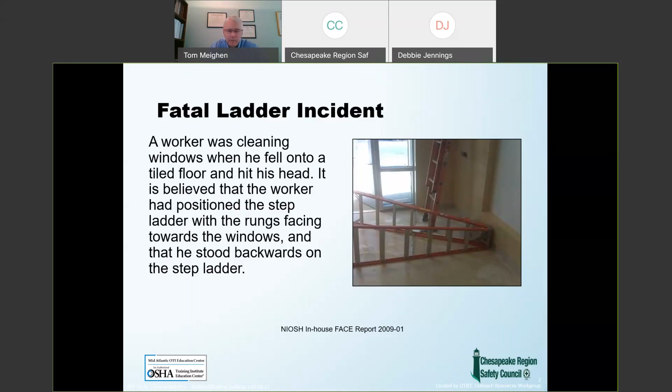Very tragic. So falls certainly do cause us some grief and some problems.

Trending. So where are we? Let's take a look, where are we as far as trending overall for falls?

So moderate increase or moderate decrease, we could say. But the majority of general industry accidents still remain to be slips, trips, and falls within general industry. Kind of a curious statistic.

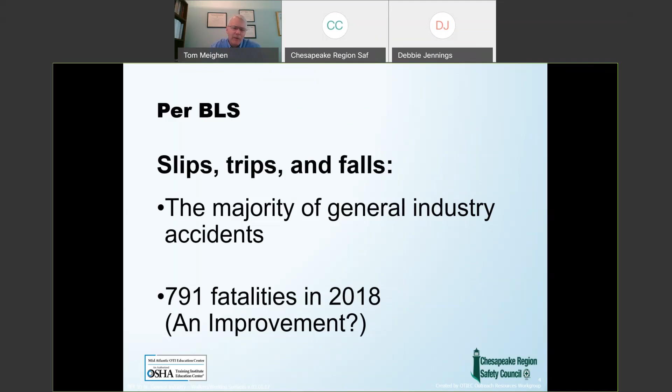Let's take a look at the citations. One other slide I want to hit you with: if you're in the construction environment, and many of our participants are, you realize falls are part of the focus for the big four, being the primary cause of fatalities in construction. But if you take a look at overall statistics, falls are still number 2 or number 3, with transportation accidents being number 1 by far. When I say transportation, it's not just working on roadways for construction operations, it's also people operating motor vehicles or somehow connected with motor vehicle operations and fatalities related to that, traffic accidents being one of the highest generators.

But a curious part of this statistic is what number 3 is, the third group of columns over: violence. This one's always a surprise to me. It's always a shock to the audience I present to also. Violence in the workplace is number 3, something to consider. Not the focus of today's discussion, but certainly something to consider.

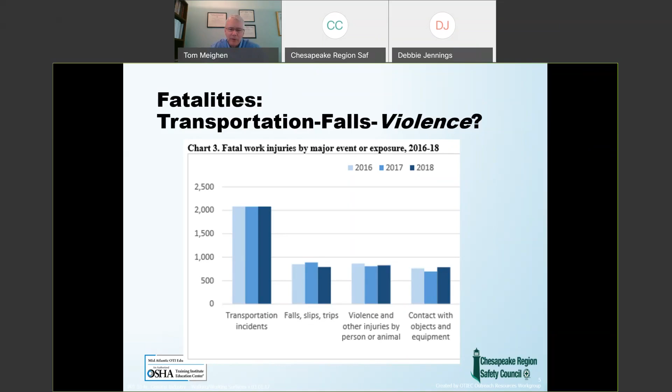So looking at citations, walking and working surfaces. Under general industry, walking and working surfaces for fall protection exposures still falls within the top 10 citations issued by OSHA. When you combine any of the other fall-related exposures, we still see significant numbers of citations in general industry focused on subpart D, 1910, CFR 1910 subpart D, focused on walking and working surfaces.

Not a lot of complexity to this standard. It's only 11 pages long. We'll cover a bit of that and some of the highlights through this discussion.

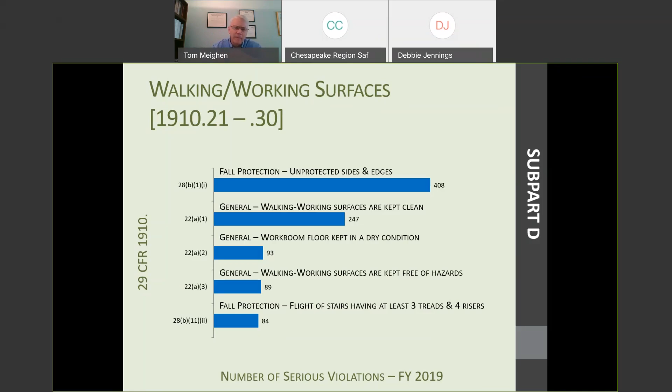Well, how about construction? I put the arrows to the side of this one. These are OSHA's most frequently cited issues in 2019, most frequently cited serious violations. 7 out of 10 are one way or another related to falls. Fall protection in residential construction, that's not really a surprise to anybody. You drive by job sites and see people working on roofs, working on framing. You see the limited means of fall protection a lot of times. Ladders not extended 3 feet above the landing.

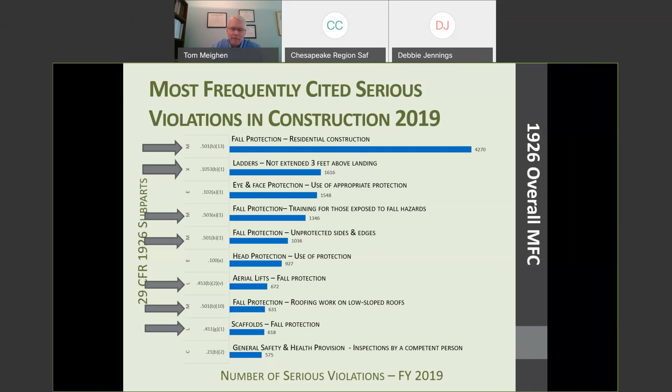Really? We haven't learned that one yet, but a good slide coming up for you on that. Scaffolding - falls from scaffolding is included in that, general safety provisions as far as being inspected by a competent person. Are people looking for what fall exposures might be present on a job site? So you can see 7 out of 10 of the top 10 citations most frequently cited by OSHA in construction are one way or another related to falls.

Well, so what else are we going to talk about here this morning? This program will be about an hour in length. My presentation will run 50, 55 minutes, and then we'll open it up for some discussion or question and answer after that. So, 29 CFR 1910 subpart D, walking working surfaces.

This standard came out just a handful of years ago. It was kind of a consolidation of some others, and we developed the standard. It's broken down into a group of very simple areas, and some that address more complex topics. If you get into areas like ladders and ladder construction, they go into details including drawings, very specific detail. So it gets a little more specific in those areas.

So we'll address identifying some of the more common hazards, identifying some of the best practices for dealing with those hazards, and then recognizing what employer requirements you have - what are the requirements for you as an employer regarding fall protection?

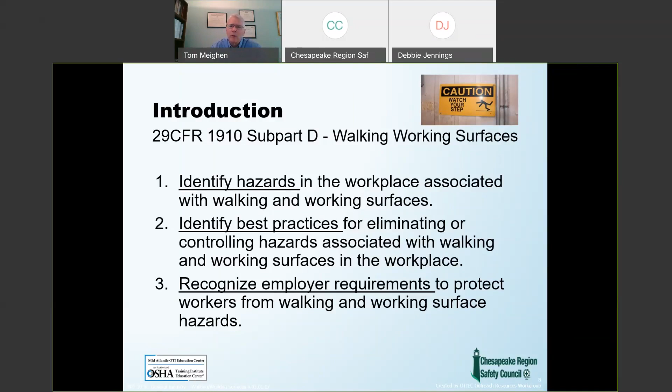So the scope of subpart D, it's worth reviewing this - I'll read it to you - applies to all general industry workplaces. Pretty comprehensive, all, right? Covers all walking and working surfaces unless specifically excluded by an individual section of this subpart. All walking and working surfaces unless excluded. If you put your feet down on the ground, if you're standing by a piece of equipment, guess what? This standard applies. Pretty broad, very broad scope.

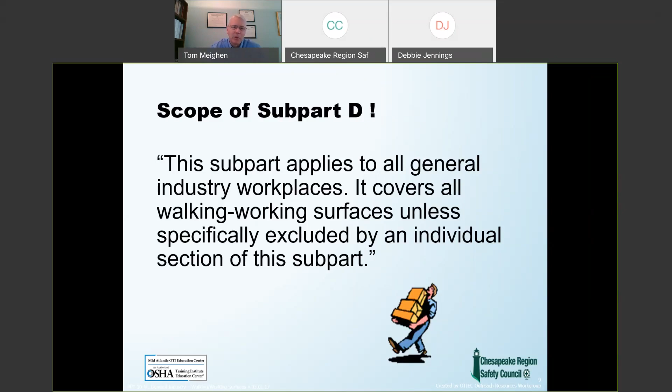So slips, trips, and falls - are they preventable? Absolutely they are, by design of workplace and work processes. And that's where, with the hierarchy of controls that we implement anywhere else, if you can engineer it out, there you go.

Take care of it: design of workplace and work processes, good housekeeping, or the administrative factor.

I don't know how many injuries over my career I've seen, but quite a few have been related just to general housekeeping situations: debris left on the floor, wet surfaces, slippery surfaces, tripping hazards, impalement hazards. Many, many injuries related just to good housekeeping efforts.

Safe walking practices. Well, what are we talking about? We're talking about just one foot in front of the other. Are people walking around looking at their cell phones instead of where their feet are going? We've all seen videos of that on YouTube, and there are more to come, I'm sure. So, wearing proper footwear. The footwear you have on is a factor in your safety for walking.

On job sites and construction, you want something that has a little bit of tread, but in an office area, tread would be a disadvantage. It depends on the surface you're dealing with, the material you're working on. There's a coefficient of friction that can be calculated on really any walking surface, and the tread or the shoe you have is a factor in how that works. Also, what might be interfering with that, such as liquids, oils, greases, antifreeze, mud, debris, can all influence that coefficient of friction.

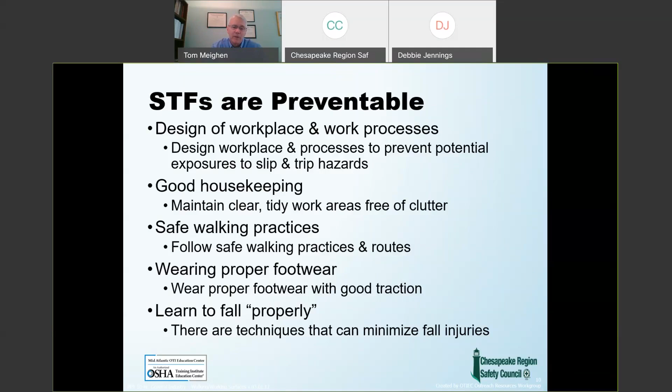So, definitions. In the standard, there's literally a page and a half of definitions. Now, the definition of a hole: a gap or open space 2 inches in its least dimension, pretty common. We've seen that one before in construction too. Low slope roof, same definition. Opening, gap, or open space in a wall, at least 30 inches high, at least 18 inches wide. Think of a window opening.

That's what we have. Qualified persons, we've seen these definitions before: qualified versus competent. Qualified person: training, experience, demonstrate the ability to resolve the problem. Competent person: having the authority to actually implement the change and get it corrected. But there's a page and a half of definitions in this standard.

Be aware of that. So what are the hazards and controls? Your typical slip hazards, nothing unusual here when you look at that: grease, oil, ice, water, snow, liquid spills, polished floors.

Early in my career, I had the opportunity to work with a group of retail facilities, particularly grocery stores. Slips, trips, and falls were definitely a factor within grocery stores. So we worked on getting their staff trained up on cleaning up after any spills they might have had, particularly in the produce department. The type of wax and polish used on the floors was always a factor, and the flooring material they utilized was certainly a factor they would pay attention to. So, dealing with those simple issues.

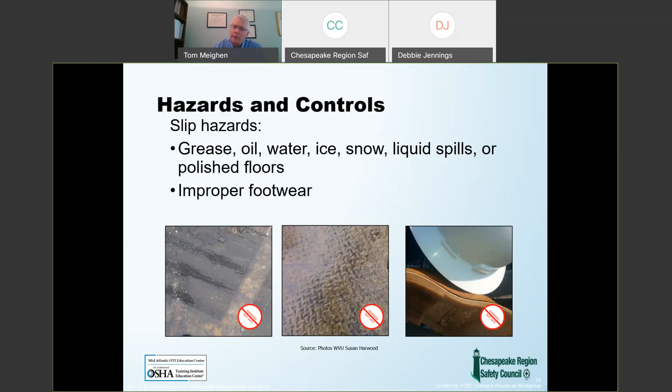Improper footwear also being a factor as far as hazards and controls. Housekeeping again plays a big part here. So within the standard, they actually address that surfaces are to be kept in a clean, orderly, and sanitary condition. We're not reading the standard specifically, but there is a paragraph that reads similar to that. There's a requirement for drainage for wet operations.

This shouldn't be a new concept for us. Clean up, or mark and report spills, so employees have a means of actually addressing spills and either cleaning them up themselves or getting them cleaned up and protecting the area. In the interim, you also see traffic cones set up, you see the wet floor sign set up, to protect people in those areas.

Eliminating sharp and protruding objects. Now what are we talking about here? Again, proper storage of materials, things overhanging that somebody might walk into. Could be something as simple as somebody leaving a drawer open in an office environment.

Removing ice and snow frequently and regularly. Inspection and removal of ice and snow frequently and regularly. This is actually addressed very lightly, but it's in the standard, so be aware of that, pay attention to that one. What is frequent and regular? What's your operation, what's your exposure, what are people working in? Is this part of their working environment? Is it part of their access? Is it part of their means of egress,

coming or going, we'll say, of your office area or your work environment?

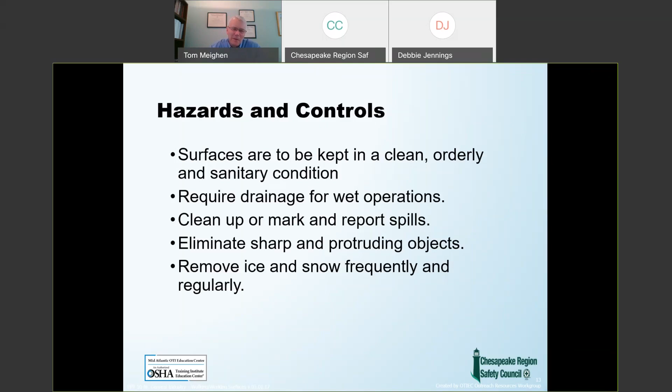Capable of supporting intended loads. Remember the old standard? It actually had to have loads and rack storage that were marked as far as what the load capacity was. I can't find that in the standard. Maybe it's buried in there, but I haven't seen it yet. But they do define it's got to be capable of supporting the intended load. What is the intended load? Is it one employee? Is one employee carrying material? One employee pushing a cart? Two employees? A forklift with loaded material on it? A boom lift, a scissor lift? What is your intended load on that floor or on that surface?

It's got to be inspected regularly and as necessary for hazards. So people are paying attention to look to see if there are hazards. Are we really paying attention? Did the type of operations that we perform, manufacturing or construction, generate debris? Does it generate some means of bad housekeeping? Can it tear up the floor of the walking environment that we're on? Can simple wear and tear affect it? Paying attention to these simple little details.

And providing a safe means of access and egress. Here we go, the coming and going, right? With that, employees are coming into the building, into your facility, and leaving the facility. Are they protected during that transit period? Actually addressed. Pay attention to that.

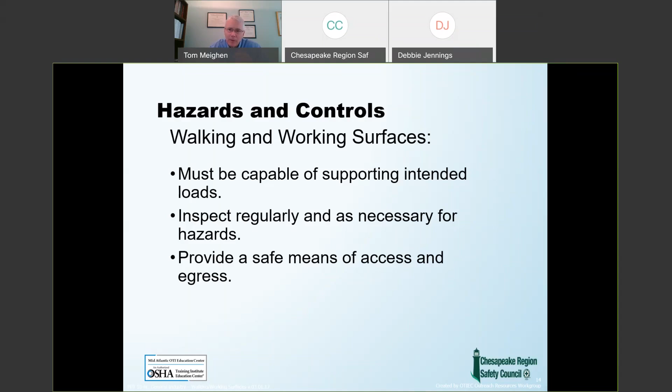So, hazards and controls. Trip hazards, well, could be poor housekeeping, loose flooring, carpeting, uneven surfaces. You look at the slide on the right, they show the indication of either an open gap in a flooring material, and certainly somebody could get hurt very severely in that situation. The center slide kind of looks like roofing material, but just consider normal wear and tear.

As we work in an office environment, for example, we walk up and down the same hallway every day. Over a period of years, the carpet deteriorates. You get a little thread that pulls up. Somebody trips on that. That thread then breaks a seam. That seam gets torn up. Somebody else trips over that. At what point do you recognize you have to address that hazard? Paying attention to those simple little things.

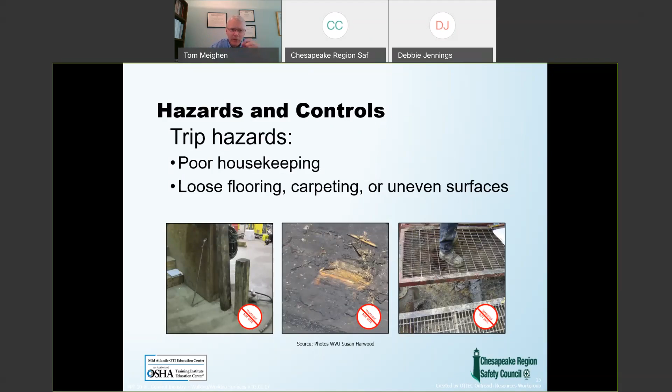Cords, hoses, open drawers, protruding items. Cords and hoses, a common trip hazard. In a manufacturing environment, you see all kinds of cords and hoses available for whatever operation is being performed, as you do also in construction too. So how are they stored? How are they laid out? Are people protected so they aren't tripping over these?

And then looking at the slide on the right, they indicate in the picture here just piping, storage, things that might be protruding hazards that people are going to catch themselves on and fall over. I've seen a number of cases where I've had people unloading trucks. You take the material off the truck, set it down behind them, turn around, pick up something else, and then trip over what they just put down. Think about it.

Then once they do unload the truck, is your path clear to where the material is eventually going? Have you taken a walk through and made sure that there's nothing in the way? No slippery surfaces, no impalement hazards, nothing to trip over, and you can get yourself to where the material has to finally go. Simple concept, but I've seen many accidents related to that.

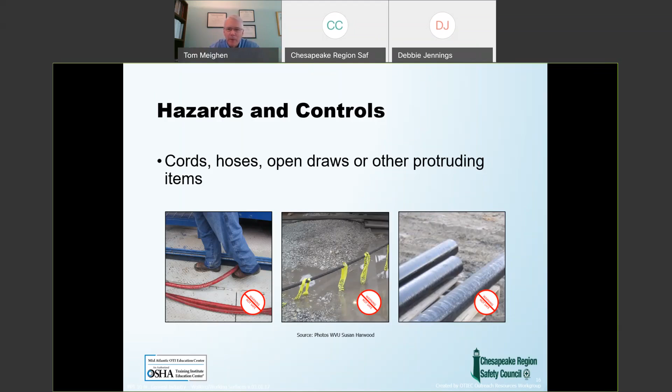So controlling trip hazards. Let's deal with those aisleways and passageways. They've got to be well-lit. They've got to be cleaned. They've got to be marked. Do you have them marked out? Do you have storage within your aisleways? Something to consider. Do you have a means of controlling that so that it's inspected and addressed on an ongoing basis?

Material storage, work-related scraps. Are you cleaning them up? Do you have bins? Do you have materials available to clean them up efficiently? Trip hazards, addressing those. Hoses, cables, we covered that just a moment ago.

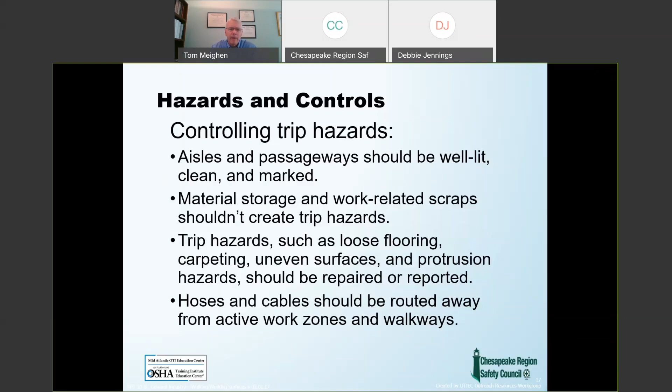So fall hazards, what else do we have? Elevated surfaces that you might have in your work site. Tops of tanks, towers, machines, platforms, open pits. Think of your local oil servicing facility, pick a name. But within those, they have pits where people are actually working underneath the vehicles. Is there a means of addressing fall protection for that? If you notice, some of them have nets that they'll pull over top of the face of that in case somebody falls into it.

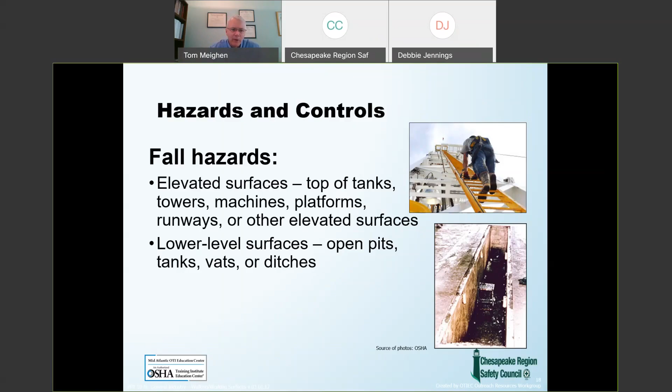You also notice that within the standard, there's a means of addressing that specifically, because they realize you have to have a vehicle on that, so you have to have access to that point. But how do you then at least delineate the area where the hole is, so people are aware of the hazard and don't accidentally find themselves in that hole? Tanks and towers, best engineer these things. Whenever they're being constructed, here is your opportunity, really anytime for a walking working surface, to implement the proper controls in the engineering and design phase, so that people are protected from that point going forward.

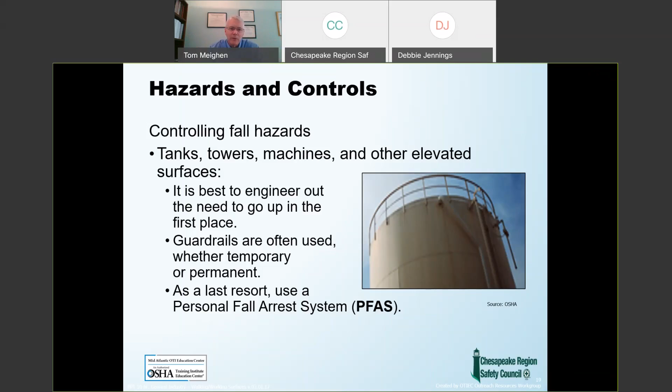Guardrails might be the best means you utilize. And as a last resort, remember our hierarchy of controls: we're going to engineer it out, we're going to go with administrative means such as housekeeping. If those don't take care of it, then we are down to using personal fall arrest systems. Yes, PFAS, personal fall arrest system. You got your anchorage points, your body harnesses, the components, your ABCs.

Are there any decent materials available for fall protection nowadays? Wow, what the manufacturers have come up with. Now we have lanyards of any shape, size, and length that you want. Some are retractable, some are just shock absorbing. Some are 3 foot, some are 6 foot. Retractables go 10, 12, 30 feet - remarkably distant - but they act much like your seatbelt. Somebody falls, bang, it stops.

Anchorage points, what are you going to tie off to? They have beam clamps available. They have clamps to go around piping systems, all kinds of materials. And the harnesses themselves, how they have improved. I started my career literally when they used body belts. They would give a person a body belt and maybe even a steel, not a rope, lanyard.

So which way do you want to fall? Do you want your toes to hit, your head forward or backward, or do a sideways bend? So the harnesses and the quality of the harnesses have improved, and also with that, the comfort of them too. They even now have drop-down loops, so if somebody does fall, they can support themselves until they're rescued. You do have to consider rescue of the individual too if somebody should take a fall.

So you just hand it to them, say, oh, by the way, here's your harness, here's your lanyard, go have a good day? No, you've got to have very good training. Anybody that's exposed to fall hazards should have training related to their exposure for falls. They have to know how to inspect the material. What are the requirements for this harness? Does it have an expiration date on it? What is it? Who sets that? Typically the manufacturer. Are you looking for burns in it?

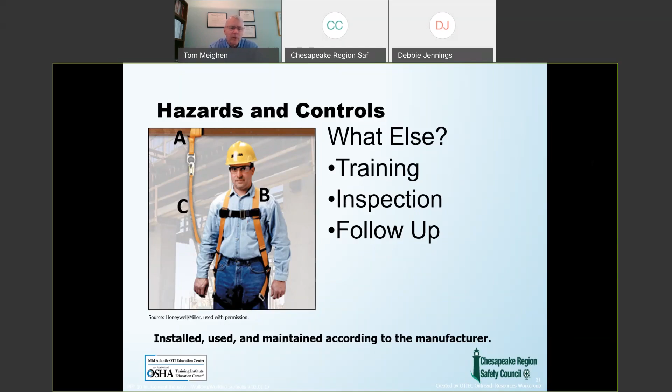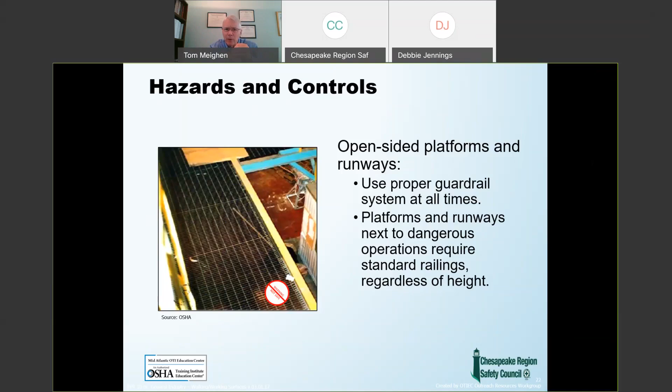Hazards and controls: open-sided platforms, runways - proper railing, proper guardrails are required. If it's over top of dangerous machinery, guess what? Got to protect it. 4 foot is generally the fall protection requirement for general industry. What is it for construction? 6. Interesting. What is it for scaffolds? 10? Yeah. But then you get into steel erection, we get into other standards too, different elevations. But in general industry, 4 foot. If it's beside dangerous equipment that somebody could fall into and get hurt, ongoing fall protection is required.

Structural collapse. Back to the question: does your surface support - is it adequately built to support whatever your expected load is going to be on that surface? People, equipment, are you going to run a forklift across that someday? Well, if there's a potential for that, better make sure that the flooring can take the load.

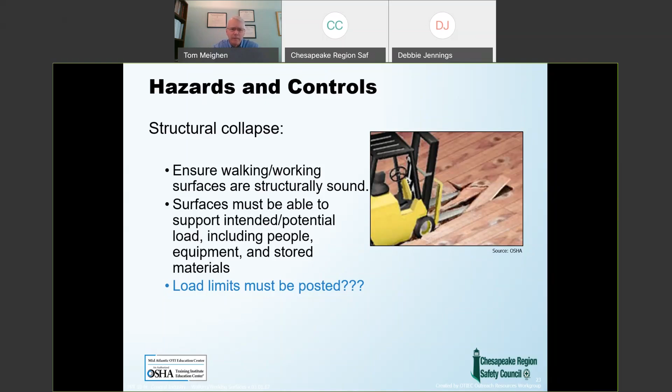Hazards and controls, we'll hit on a couple of the highlights here. We'll address ladders, scaffolds, stairwells, wall openings, elevated surfaces. Start off with ladders. We've all seen ladders, nothing new to anybody here. Your basic step ladder, your extension ladders, your fixed ladders. Fixed ladders, the quality of those are certainly getting better and better as the years go by, and you'll see why.

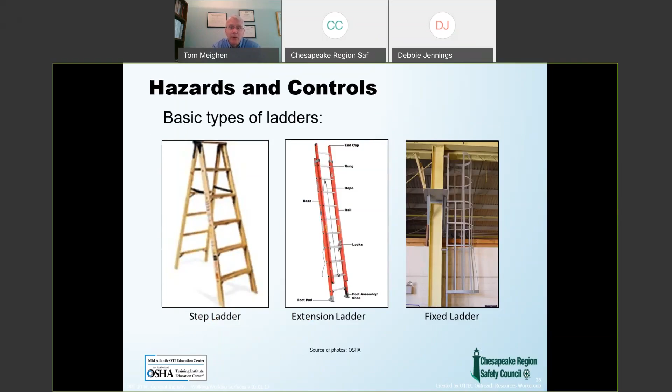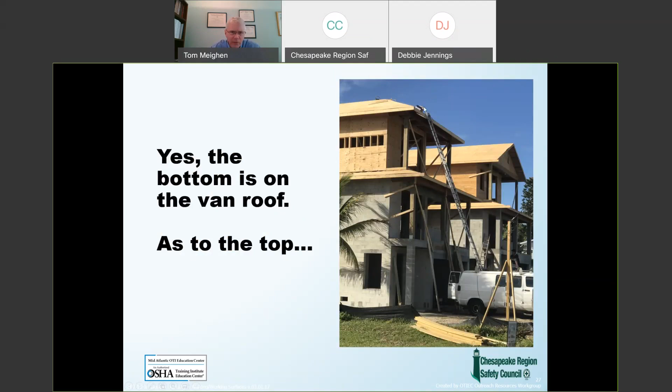This is a ladder picture taken by Dave Medeiros, our president. He was doing a drive-by through a neighborhood and noticed a gentleman on a ladder going up, with the ladder base set on the roof of a van. I guess he set it there so he could avoid getting the extra 3 feet over the top. People get very creative, very, very creative. And that certainly is not the means of dealing with it.

But ladders have certainly contributed to a lot of accidents, a lot that I've seen over my career. Scissor lifts, while hazardous, I have seen actually be a factor in reducing injuries for employers I've worked for, also increasing productivity, so they become a wonderful tool. But there will never be a replacement for all ladders. So the leading cause of fatalities and injuries comes down to the right choice of ladder, using it properly, making sure it's set up properly, and making sure the ladder is in good working order and has been inspected.

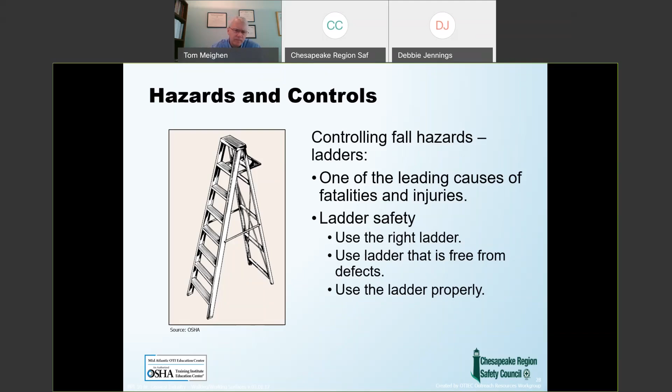Had a situation where a job site was finishing up in DC in a construction environment. One of the journeymen sent down his apprentice to go pick up a ladder because they had to do some work in the ceiling, which was about 10 foot high. The apprentice was a little lazy, had a choice between a 6-foot ladder and an 8-foot ladder. He came up with the 6. What happens? He ends up working off the top of the 6-foot ladder.

Very top - an 8 foot would have gotten him there safely, but he ends up on top of the 6-foot ladder. The ladder kicks out. As the ladder goes down, he goes down. His leg gets hung up on the ladder on the way down, a compound fracture of his leg. A 4th-year apprentice ruined his career early, right there. But this was just a matter of the choice of the wrong ladder.

And also, let's look at the journeyman too. What was his part in that? He didn't send that apprentice back down to get the proper ladder, even though it was available. So he's not free of blame either. They both learned a bad, tragic, very difficult ladder lesson.

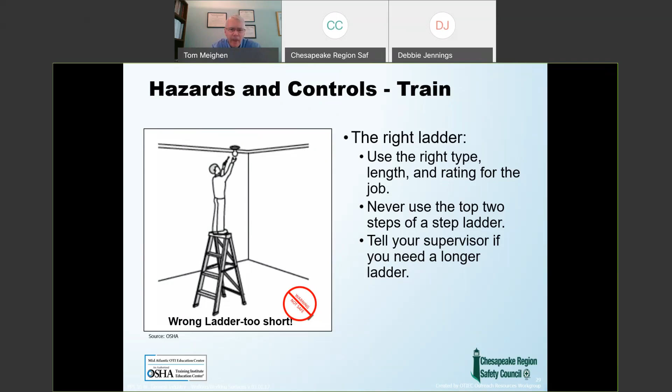Hazards - simple 3-point contact, climbing up, climbing down, making sure people are holding on. Got caught up in one bad injury, and a lawsuit came as a result too. A worker on a job site decided to go up a job-built ladder, and the ladder was actually built right, but it was put in the wrong place. It had been installed right in the fall protection, the perimeter fall protection, top and mid cable. This gentleman decided to go up the ladder with tools on his shoulder, one-handing up with tools on his shoulder. Gets to the top, has to balance himself as he pulls through the cable. Well, that doesn't go well. He goes off backwards - and here's the interesting part of the suit - he lands on somebody else's employee on the way down. So now we have 2 people out of commission and badly injured from that operation.

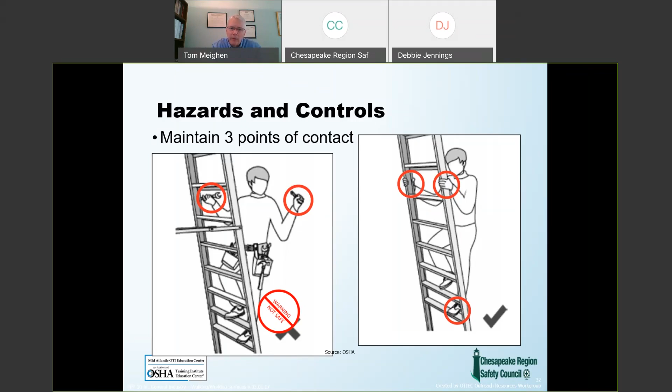So hazards and controls, 3 foot over top. This citation, it's remarkable that it gets issued as many times as it still does. It's probably in the top 3, I think, if we go back and look at the slide again, of citations issued in construction. And angling the ladder properly, your 4-to-1 ratio: 4 foot up, 1 foot out.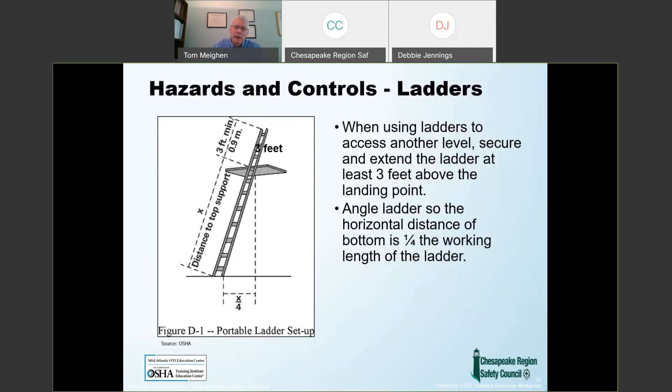Hazards and controls for fixed ladders. I mentioned this earlier on in the presentation. OSHA really got into some very good specifics as far as requirements for ladders within the standard. I'll just show you, here's a print for example, some of the detail. And the cut and paste that I have here on the slide too came right out of the standard itself. If you're going to build a ladder, take a look at the standard. It gives you some very good details and specifics as far as what the requirements are on building that ladder before it's installed. Hazard control.

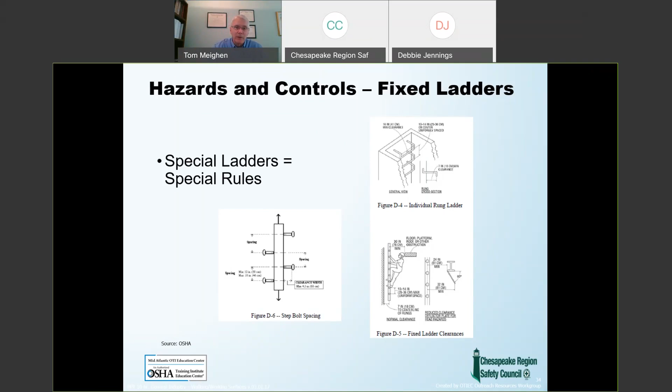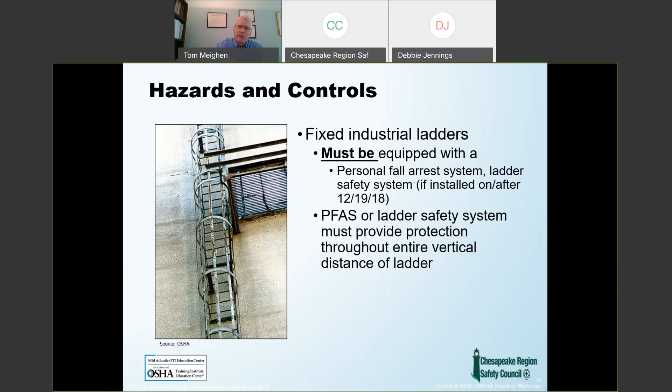So any fixed industrial ladders have to be equipped with a personal fall arrest system or a ladder safety system if installed after December 19, 2018. We're there, folks, right? The personal fall arrest system's got to provide protection throughout the entire vertical distance of the ladder, so they are protected. There's even a piece of the standard that requires upgrades for some of these existing and much older systems. Save that, you can take a look at that.

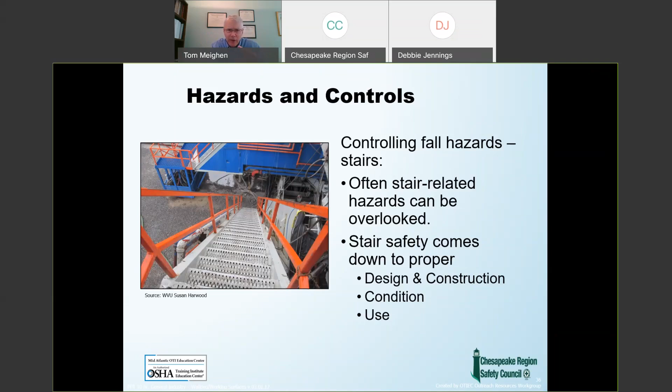Controlling fall hazards on stairs. Often stair-related hazards can be overlooked. We just start taking stairways for granted. We walk the stairs every day, we don't pay an awful lot of attention to it, our mind gets used to it, gets set to that. But the design, the construction, the condition of these all plays into it, as does the use of these. In each of those accidents I just described, one of those factors played into that accident, whether it be ladders, but it applies to stairways also.

Fixed industrial stairs have to be able to support a 1,000-pound live load, okay. 22-inch wide minimum, angles 30 to 50 degree angle, so what kind of a slope can you utilize, and no more than a 1/4-inch variation. Take a look at the diagram slide here. The 1/4-inch variation has to do with the tread and the riser. Your mind gets used, as you go up a set of stairs, to the step pattern, and if you have a variation more than, say, a 1/4 inch, it'll throw you off. So be aware of that, and that's one of the reasons they have that included.

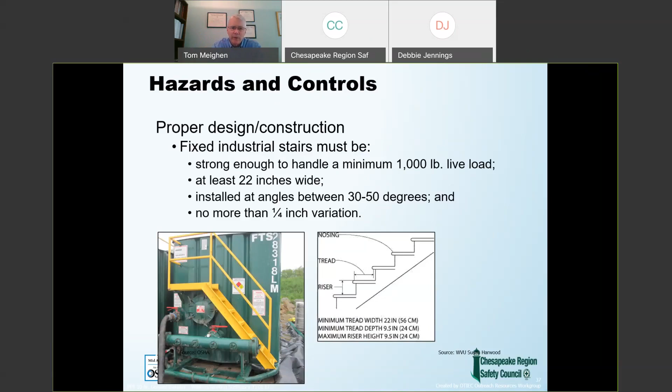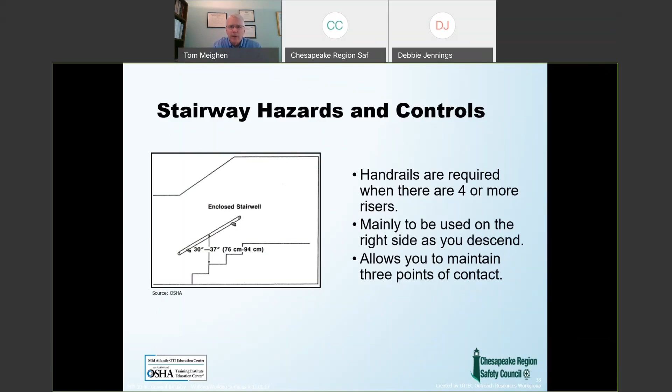Handrails required when you have 4 or more risers. Must be mainly applied on the right side. So in this case we have an enclosed stairwell. You're coming down and you have your right hand on the railing, stronger hand on the railing as you come down. These are slides also, both of these photographs are actually taken out of the standard itself.

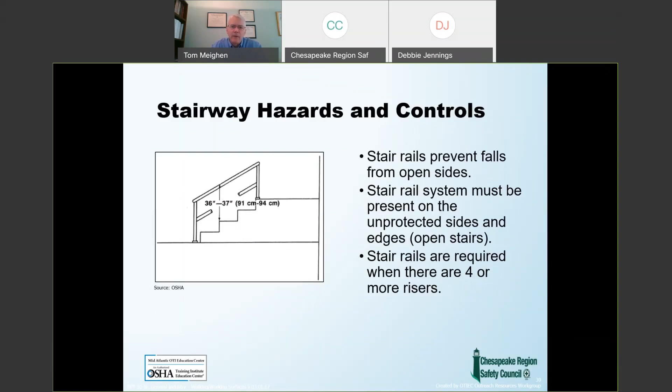Now here again, people are coming down the stairwell. Their mind is used to the step pattern, not always looking out ahead. Here again, much like driving, cell phones are a factor, I think, in a lot of falls today. People aren't paying attention to the details. They get hung up, trip over something, bang, there you go.

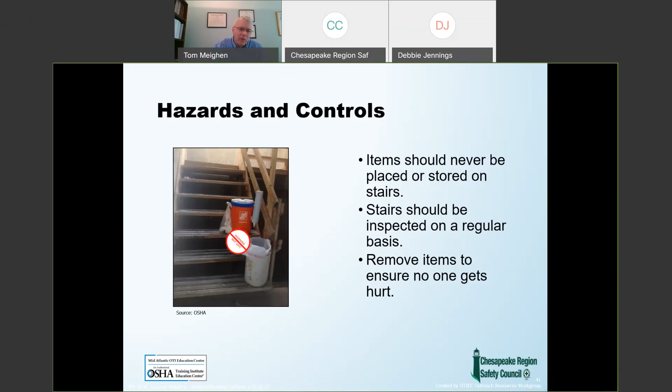So no storage materials in the stairwell. How about guardrails? How do we protect our perimeter walls? Well, wall openings that drop more than 4 foot have to be guarded. Guardrail systems have to be installed, with a top rail, mid rail, and toe board.

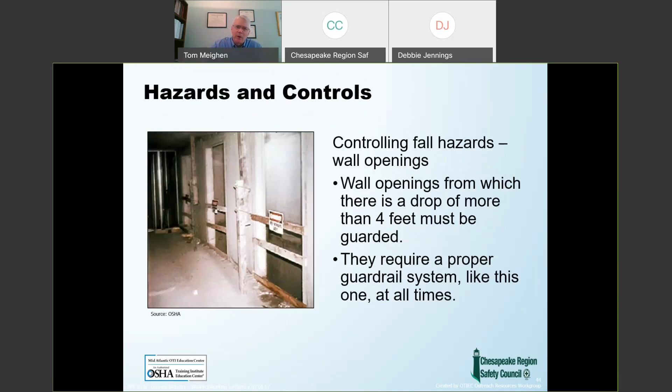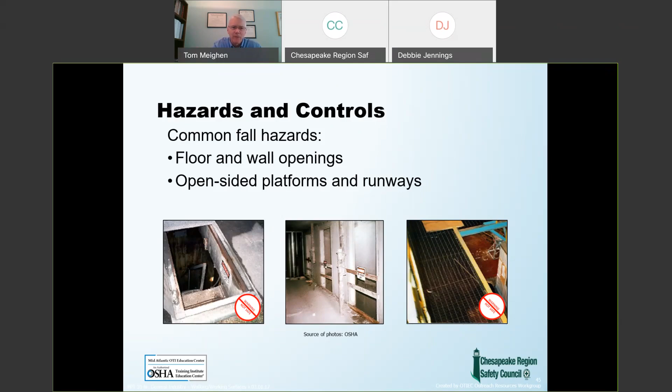The second slide, the one in the middle there, is much like the one earlier, indicating that we have the perimeter protection with the top rail, mid rail, and toe board. And the one on the right, where we have grated flooring but no railing at all, and we have equipment down below too, that would require protection by railings, with a proper cover or guardrail system at all times for this open hole.

Posting a guard - this is actually coming from the OSHA slide collection too. Posting a guard to monitor these openings for temporary access is permitted. Well, if you're going to post a guard, much like construction fall protection, make sure they don't have any distracting duties. Again, back to the cell phone or something else that's going to distract them from monitoring somebody going into that area. Is that your best means of protection? Probably not. A real physical barrier is going to give you better protection.

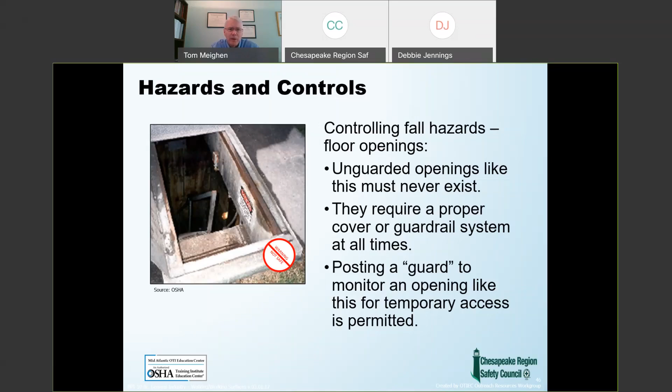Guardrail systems, how do you build them? Have you seen this before? 42 inches plus or minus for your top rail. I've seen that before somewhere - yeah, construction standard, much like the personal fall arrest system. By the way, if you're going to utilize a personal fall arrest system for fall protection, some of that's even addressed within 1910 in a different section under personal protective equipment. So pay attention to that too.

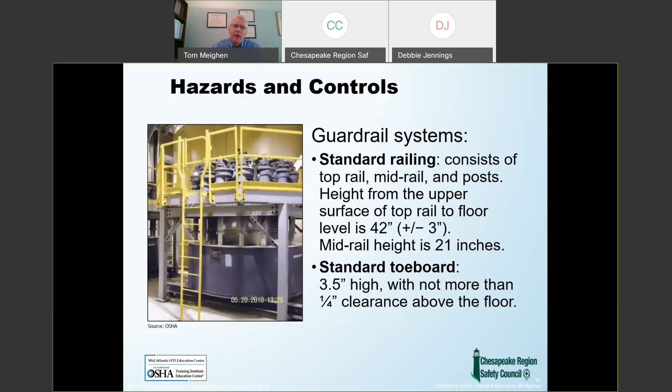Standard toe board, 3.5 inches high. Where does that come from? What's the width of a 2x4? Well, we applied that for construction, also in general industry now. So let's take a look at just some of the highlights of Subpart L, 1926, regarding scaffolding. Just going to hit some of the highlights here.

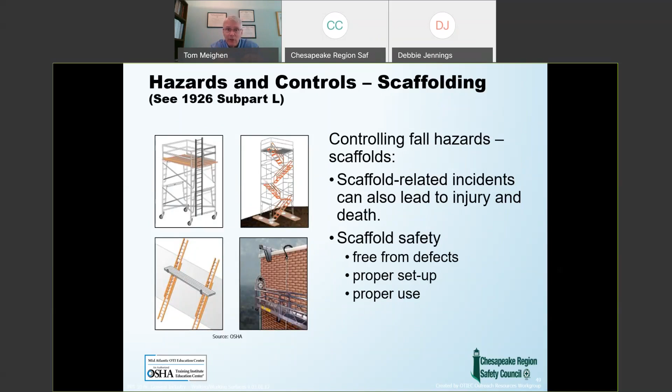With scaffold-related injuries, make sure they're free of defects, properly set up, proper use of it, proper training. If somebody gets on a scaffold, they should be trained on that scaffold, on getting on, what to look for, and what the hazards are, and how to get those hazards addressed. The scaffold has to be erected by somebody who's competent and qualified, so somebody who actually knows what they're doing is involved in the erection of that scaffold. And it has to be inspected prior to use.

Remarkable shortcuts taken by people sometimes, not only for their own safety, but for others too. All right, going on.

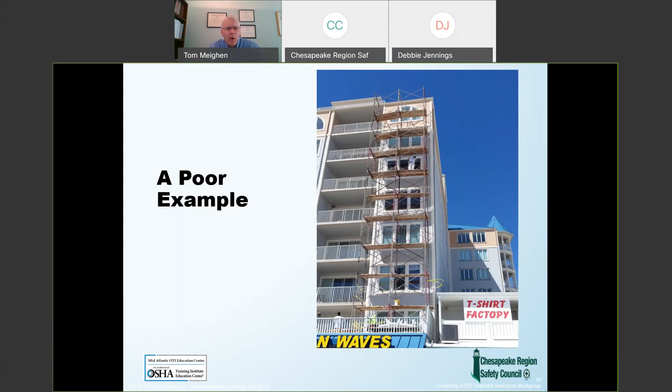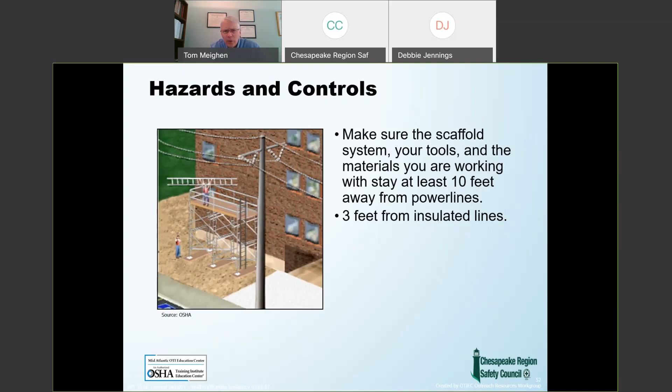Electrical exposures are another area frequently overlooked with scaffolds. It's not just the scaffold itself, but consider the tools you're working with too. If you have any conductive tools on the scaffold, that could add to your exposures, so make sure you have adequate protection.

For scaffold platforms, if it's rolling or freestanding, use a 4-to-1 ratio, 4 foot up, 1 foot across. You can use outriggers to help stabilize the platform. How about rolling scaffolds? Do you transport people around in a rolling scaffold? Not a good idea.

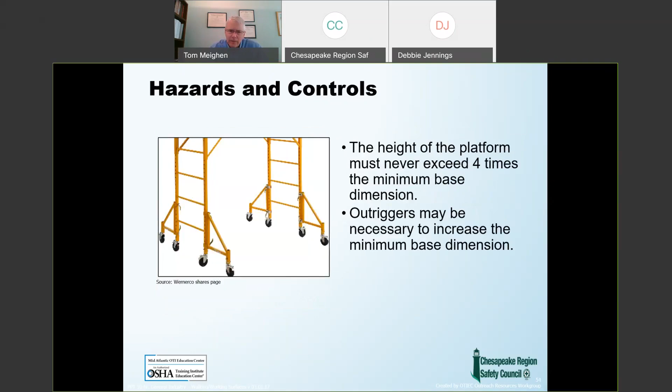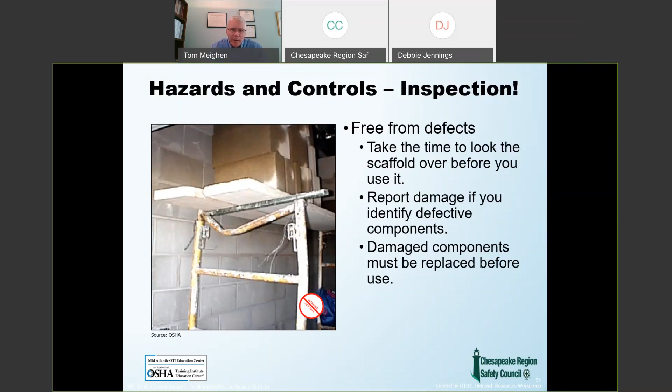This is a great picture, OSHA provided this too. If your scaffold is covered with defects like this, it's time to get rid of it. In addition to not having any real adequate fall protection, it looks like it might be at about a 6 or 7 foot level. It's interesting that they put a piece of strut here and just wire-tied it on top of that damaged scaffold, so they could put about a ton of concrete block on top of it to support it. And I don't see any cross braces there to support it either. So this was a disaster just waiting to happen.

Scissor lifts are addressed also. ANSI has come out with a new standard on aerial lifts and aerial lift platforms, including scissor and boom lifts. But while scissor lifts are a wonderfully productive piece of equipment, make sure people are trained properly.

You read the owner's manual, people are familiar with the operating controls and the limitations. You're familiar with the grade of the operation you might be working on, as far as with the transit and also the working area, the grade, the elevation. Avoid upset. Also, is your ground supportive? Is your structure supportive?

Excuse me, there's a lawnmower operating outside my window right now.

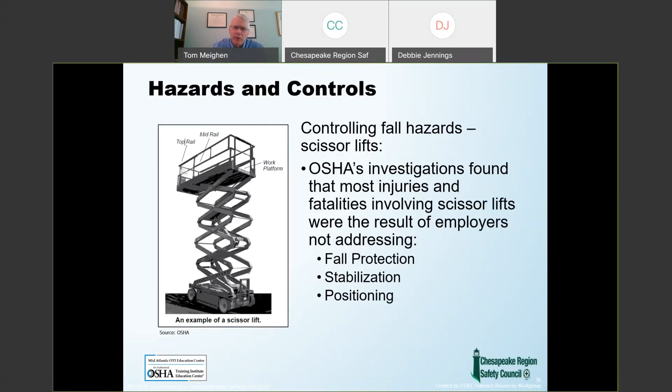Is the ground supportive, so you won't have an opportunity for anything to fall into the ground and upset the scaffold? Also consider wind exposures. You have a potential wind exposure if you're operating outside, and all considerations. But with those, make sure people are properly trained.

Do you need supplemental fall protection if you have railings? You may, and that might be a requirement. The manufacturer might address that also, and the general contractor might address that also. Sometimes people get lazy and want to stand on the mid rails. Not a recommended practice.

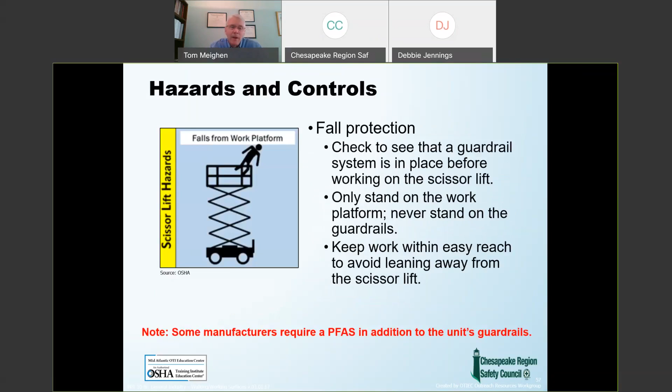Hazard control, stabilization, positioning - what could upset it? Vehicle traffic - is it set up in an area where you might have vehicle traffic?

I had one situation on a job site, somebody was operating a scissor lift but they were welding from it. Welding leads ran up to the scissor lift. They decided to transit, move the lift another 20 feet. As they did that, the welding lead was wrapped around the railing. The bottom of the scissor lift doesn't recognize this, and it upset the scissor lift because the cable for the welding lead was secured at both ends. It dropped it over.

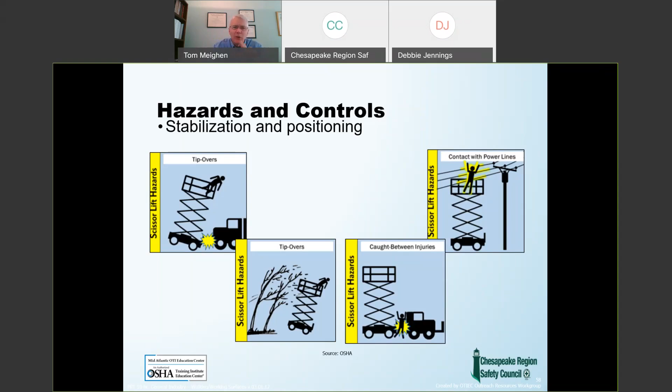So general exposures - we'll address wind exposures with scissor lifts. Kind of interesting. Got a question coming up for you.

Rope descent devices - think about window washers. Anchorage certification by the building owner. Now this is a twist, something different under Subpart D, 1910 Subpart D. Is your rope descent system actually certified by the building owner? Is it safe? Who's going to put their name on that?

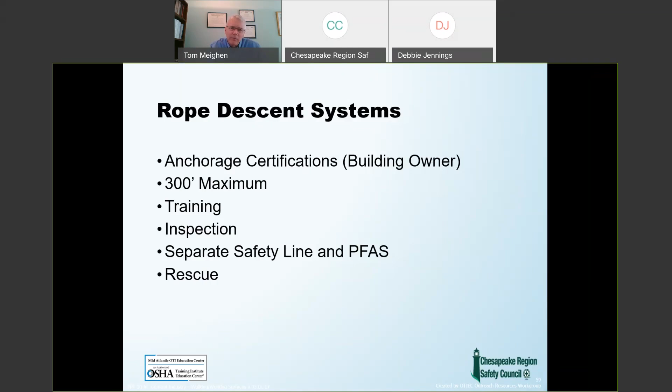300-foot maximum, and with that, also training requirements - no surprise there. Inspection, yeah I would certainly inspect that. Separate safety lines, fall arrest systems, and rescue systems in effect. How many window washer programs out there have really well-practiced or effective rescue systems put together? I don't have an answer for that, but I don't feel comfortable that it's every one of them. I think many of them probably just expect or anticipate the local fire department would be their response, and that's not the way you want to go.

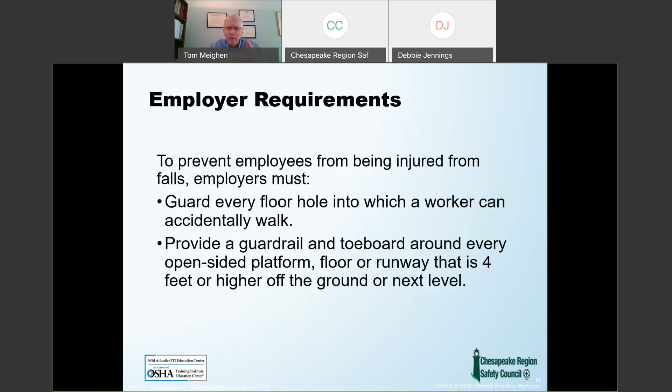So, employer requirements - as an employer, what are your requirements? Prevent employees from being injured. You've got to guard every floor hole into which a worker can fall. Provide guardrails and toe boards around every open-sided platform, 4 foot high, or if you have dangerous equipment within that area that employees can fall into.

Regardless of the height, protect that equipment, the employees from the equipment. Other means of fall protection fall under the personal fall arrest system, which falls into PPE, 1910-140, also a subpart within the 1910 standard for PPE, so address that.

Safety nets are rarely used. You might use them in that grease pit application. Travel restraints for fall protection, with training and retraining of people, is always a requirement, always a recommended practice.

Guardrail systems, nothing particularly new for most of our audience. 42 inches plus or minus 3, with a mid rail at about 21, and that top rail is supposed to support, get this, 200 pounds in a downward outward direction. 200 pounds, so that's a big employee. Not encouraging him to do this, but sitting on that guardrail, is it going to hold him?

What if that employee is 3 feet away and they trip and fall into the guardrail? Is it now 200 pounds or more? So this is a minimum requirement. I always look at this as a very minimum requirement. You should go over it, much like many of the OSHA standards.

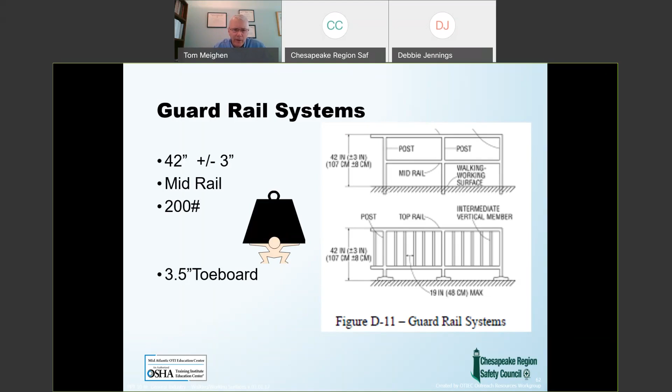And also the requirement for the 3.5 inch toe board. This drawing, this figure, also comes out of the standard itself. It's a cut and paste.

Floor coverings - we showed that picture of the opening with the sign on the inside. With that opening, how should they protect it? Well, if you put a cover on, it's got to take twice any intended load, and it's got to be secured so it can't be displaced. That doesn't mean you have to screw it down - it can still be a hatchway with a hinge and a latch on it.

This is general industry, but how about construction? The 2 times intended load, yeah. Secured, yeah, so it can't be accidentally displaced, yeah. But anything else? Under construction, you have to mark it - you've got to label it, hole or cover.

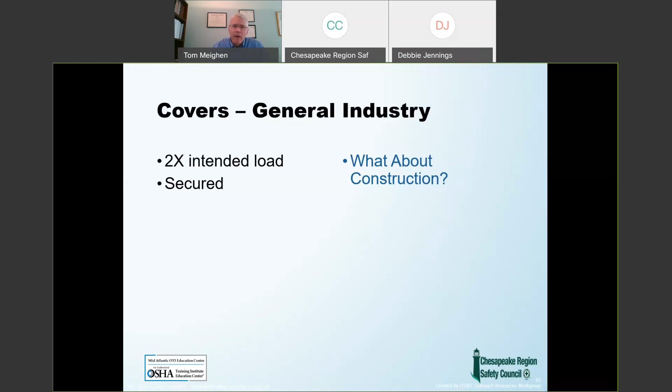For general industry, is that a good practice, a recommended practice, that people know that's an opening? Yeah, I think that's a good idea. But it's not built within the standard that way.

So other employer requirements: working conditions free of known dangers. If you walk through and you see the hazard, you have to provide a means of protecting your employee, even in the interim, until you come up with a permanent means. It's still going to protect them temporarily. Keep floors and work areas clean.

Select and provide personal protective equipment at no cost to the employees. Yeah, nothing new there. And train them on the hazards.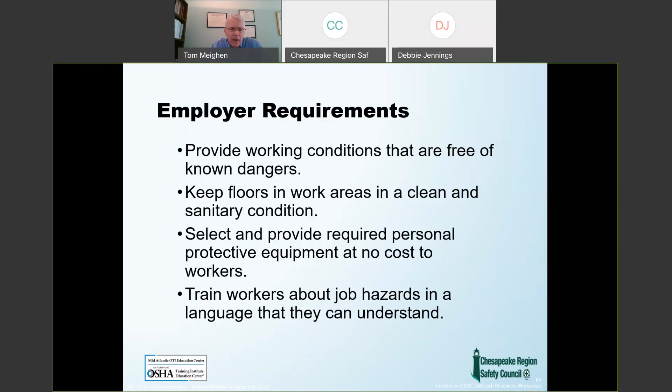All right, let's take a look at some of the hazards that might be out there - some photographs that OSHA supplied through West Virginia University.

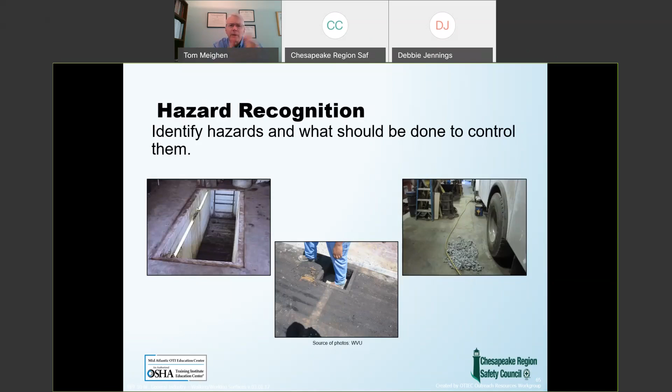So we have the open pit here on the left-hand side. Clearly we have a hazard. Within the standard, there's a means of addressing that - there's actually a little section, a couple of paragraphs, that address how to deal with servicing pits like that. Your opening here in the second slide, in the center one, clearly I would put a protective covering on top of that. On the right, well, this is a matter of housekeeping, improvement of housekeeping in that situation.

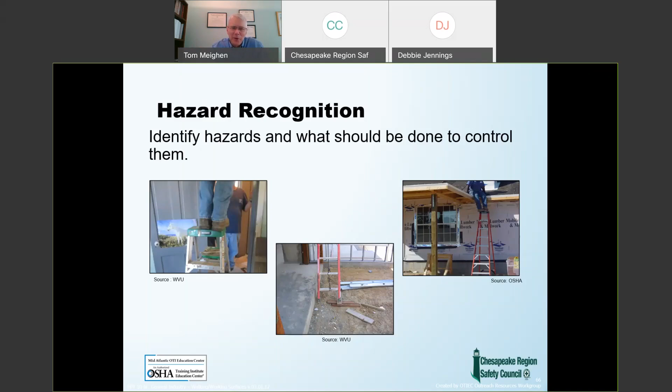And this poor individual here on the right-hand side, he just keeps popping up in slides from motion. So obviously he should have an extension ladder set up in a proper arrangement for that, because he clearly has a fall coming off of that step ladder into that situation.

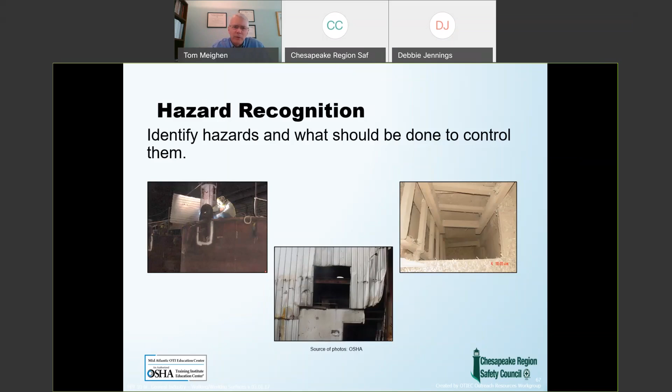Center picture, not a very good picture, but you can see we have a wall opening with a walkway in the background. The wall opening is not protected. The right side is actually a conveyor system, a conveyor pit, with about a 12-foot fall with no protection. Obviously, it should be protected.

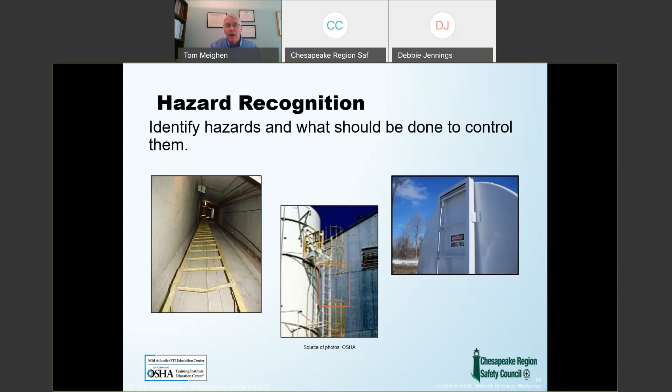On the right side, the issue is if you had to climb this ladder - we realize it's to be rotated in place - but if you had to climb this, your toes are bumping against the back wall of the tank. Again, the standard goes into very specific details as far as how you would build that ladder and what distance the person should have from the back wall to the ladder tread. Actually detailed within the standard.

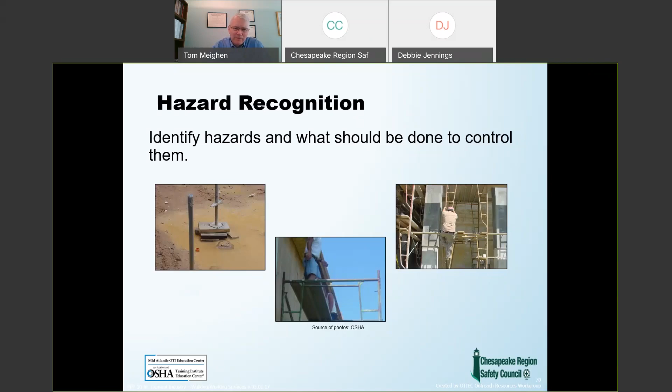Center slide, I don't know what the elevation is, but it probably needs a railing and probably needs a whole platform on that too. And on the right side, what's your means of access for a scaffold? Not climbing up the end buck - the masonry bucket, that is not the way to do it. Need proper protection. So let's take a look.

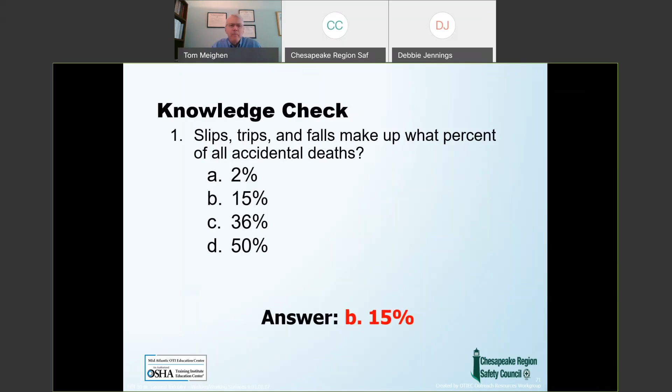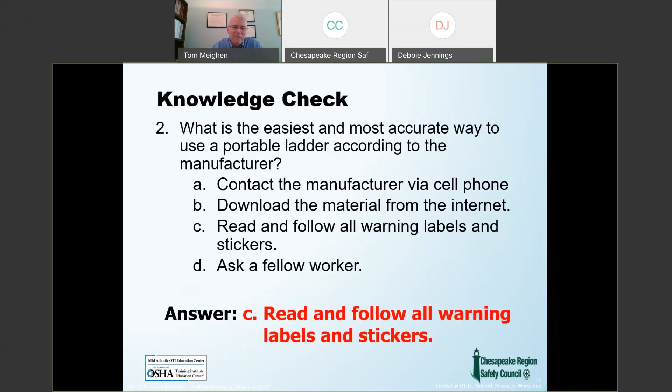Using a portable ladder to access another level - a step ladder, can you use that? I remember a guy back in the slide coming off that roof. Portable ladders may never be used... never? What? What's the sense of a portable ladder? It's got to be secured and extend 3 feet above. Carrying tools permitted? Well, I think we all know the answer to that. Ladder should be secured and extend 3 feet above the level you're accessing.

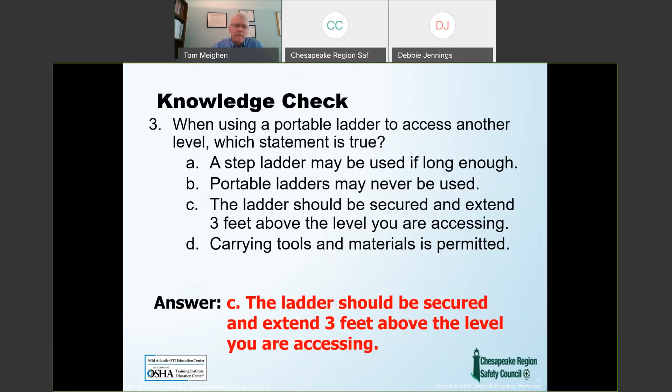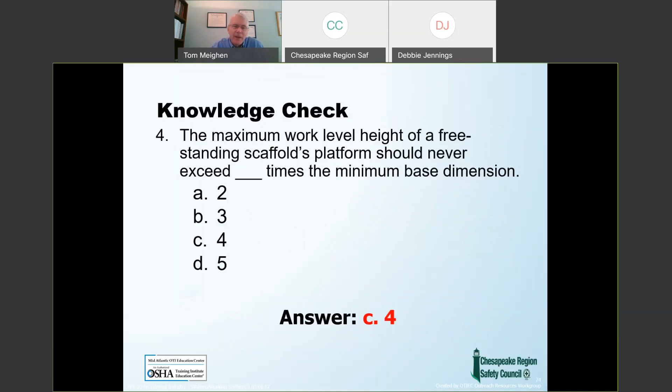Knowledge check: maximum work level of a freestanding scaffold should never exceed - remember our base to height ratio, much like the ladder - happens to be 4 to 1, but in the reverse.

What describes a safe scaffold? Firm foundation, covered that. Proper access, covered that. Proper guardrail, covered that. You also put together that it's assembled by a competent, qualified person. It includes all of those, certainly all of those above.

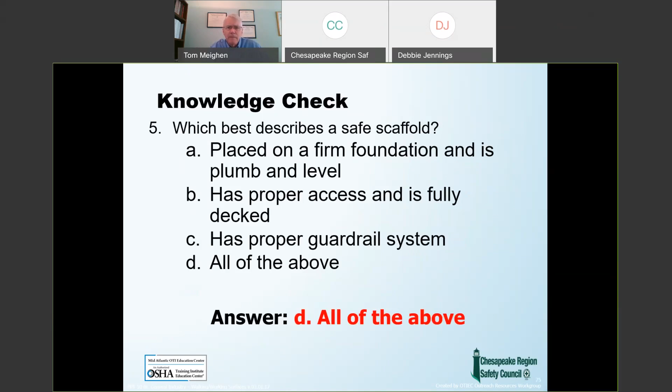Well, this is one we didn't cover, but we're going to right now. Scissor lifts for outdoor use are generally limited to wind speeds below a certain threshold. I believe it was Notre Dame University, going back maybe 10 years now, had a scissor lift on their football field, possibly the practice field, where they were videotaping the band performing a practice.

Two students were on that scissor lift, encountered high winds, and the scissor lift blew over. I believe both were fatalities, yeah, I recall both were fatalities. But how they came up with this number, 28 miles per hour, I don't know. If anybody does, let me know. Curious, they came up with the random number of 28 miles per hour winds, generally.